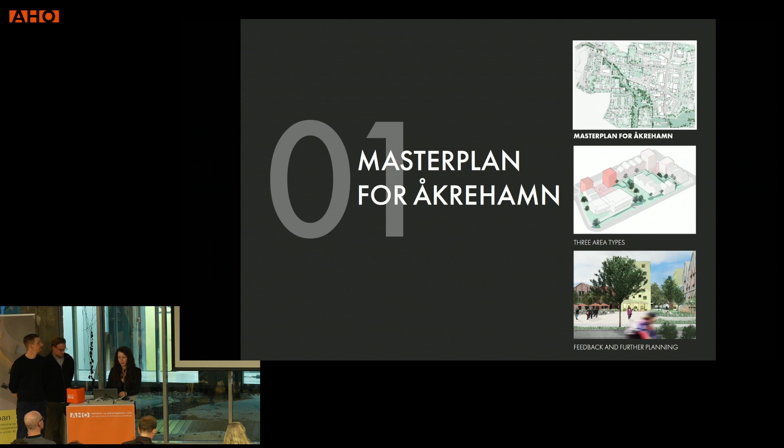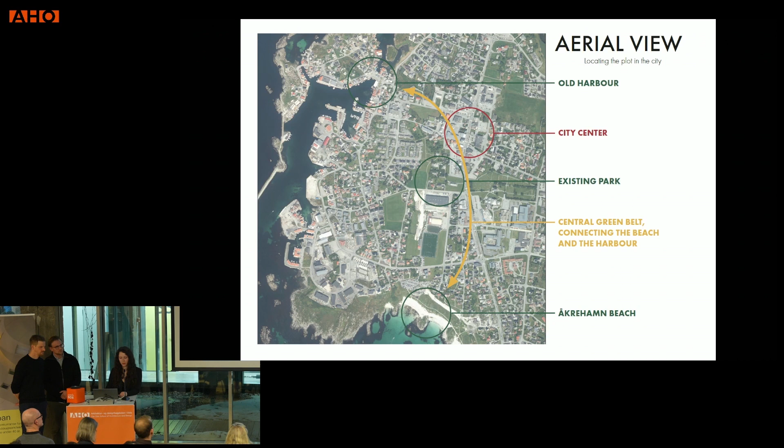But in the west part of the city, you can also see that we already have some existing nice green places, starting with the old harbor at the top of this plan. Then we have the existing park, which separates the city into two different parts. And at the bottom of this plan, you can see the Åkrehamn beach. We created a structure, the green belt, that connects all these green places into one green belt.

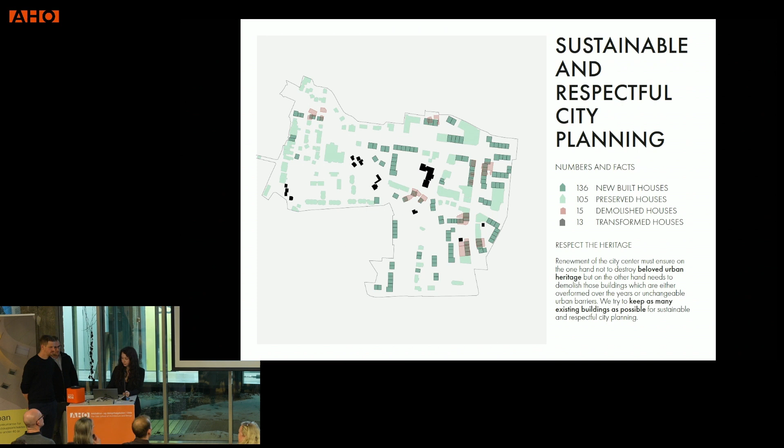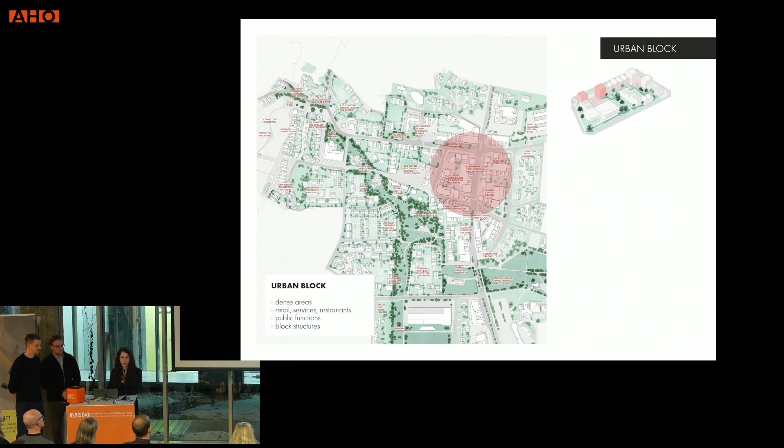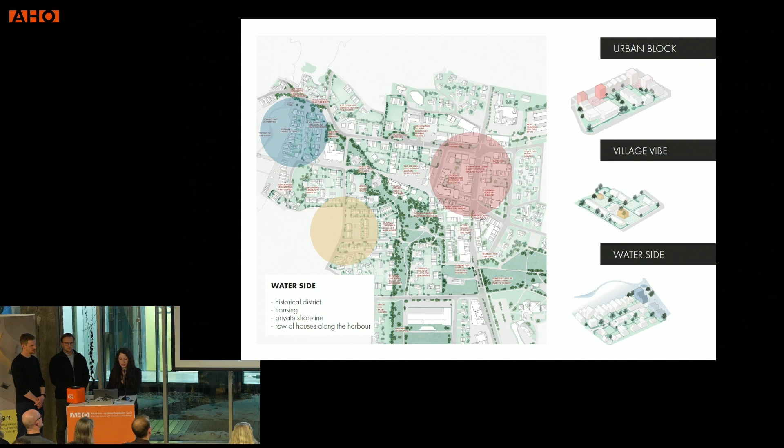For detailing, we developed three different area types, starting with the urban block, which has the density and the key scale for Åkrehamn city center. In the west part of the park, we also have less dense areas, which we called village vibe: single-story houses with a lot of green outdoor spaces, not with these typical city center functions. Last but not least, at the historic harbor, we have a historic district with a lot of nice identical buildings for Åkrehamn.

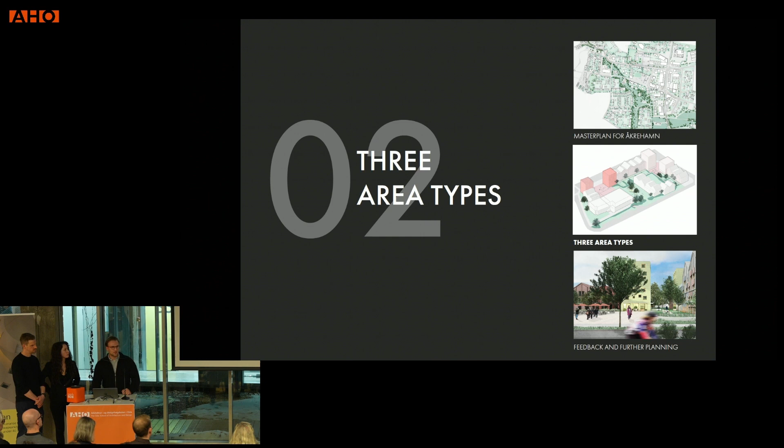As Karla introduced you to our three different area types, I'm going to go into more detail now, to explain what we mean by our types, starting with the block in the city center, which is called our urban block.

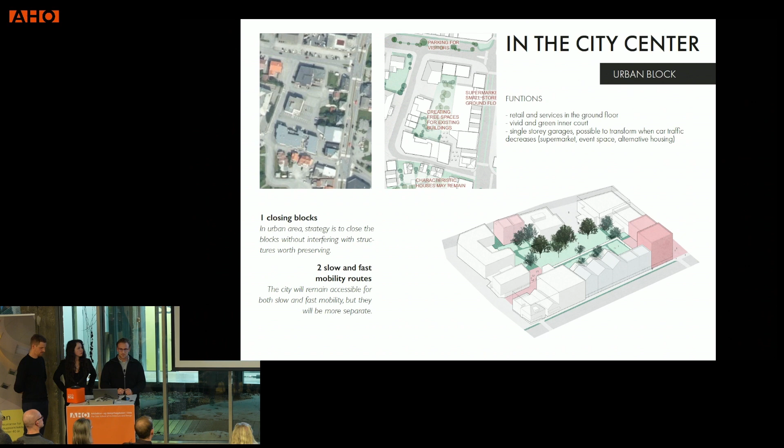As you can see, we have a street separated from the main street, which allows us to create more space for slow and even fast mobility, which is good to have both, but in a separated way.

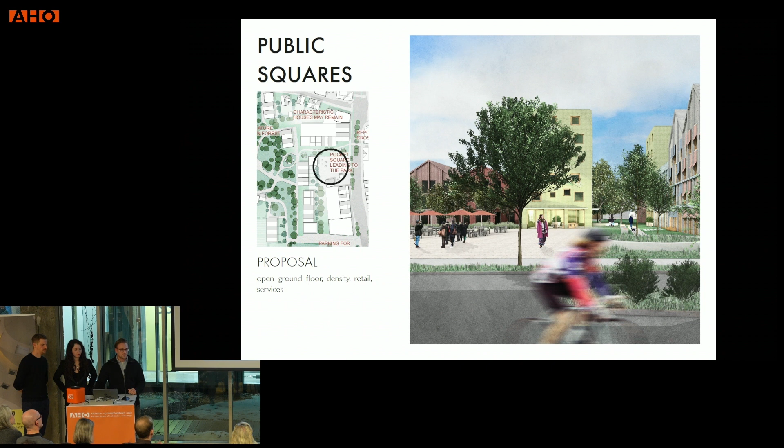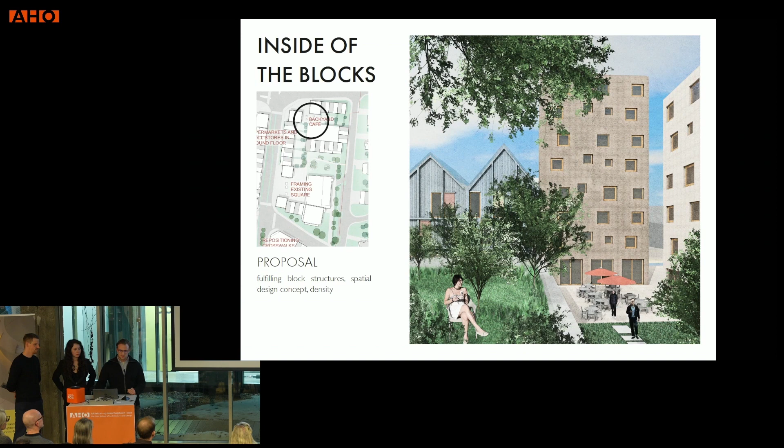Here you can see our structured urban square, which is pretty big now, but we want to have this open space for the community, for retail and services. Also inside the block, as I mentioned, we want to have it as a quiet space for the community and the density we want to create here.

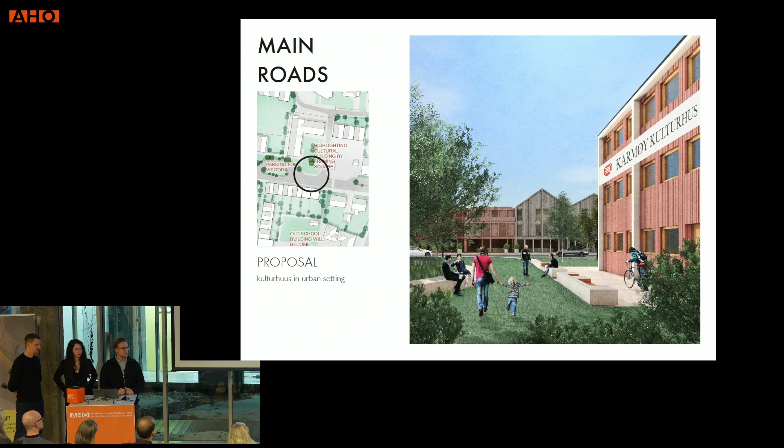On the main roads, which lead us to the Kulturhus, in the urban setting, we have this main structure in the main public area, what we call the main center of the town. This leads us to the next block.

In the western area from the park, there are the less dense areas where there is housing, like single-story housing with a lot of green area around it, and also with open green fields. So what we do there is also raise the density a little bit, but remain the village vibe, as we call it, and also bring functions into the middle of these areas.

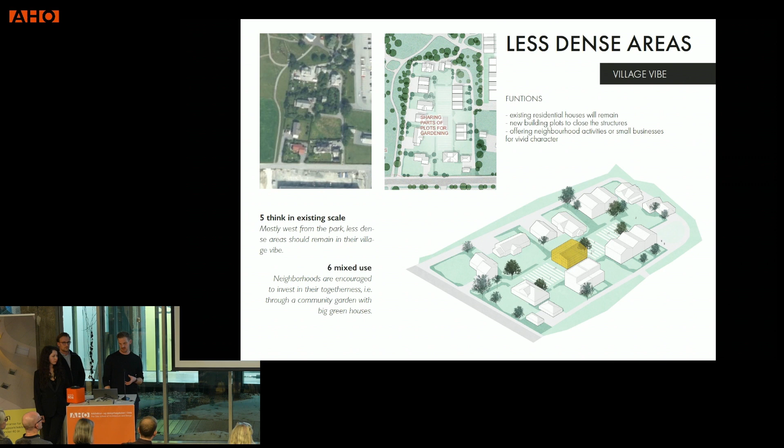These functions should be for the community, like gardens where you meet, but also commercial functions, like a brewery or some small commercial functions, to reactivate these areas a little bit more and bring them to life.

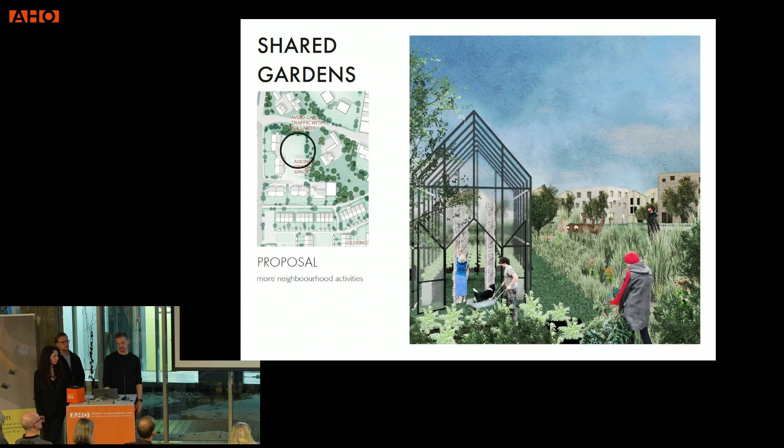In the harbor heart, it's the old heritage at the waterside. We keep almost every building, but we propose a row of housing in the north to connect the remaining square with the park, and bring new functions to the square, because at the moment it's not that public. There isn't so much going on, so the new functions will activate the square a bit.

Here in the south, there's also a lot of space where you can bring a market or activate it with small functions.

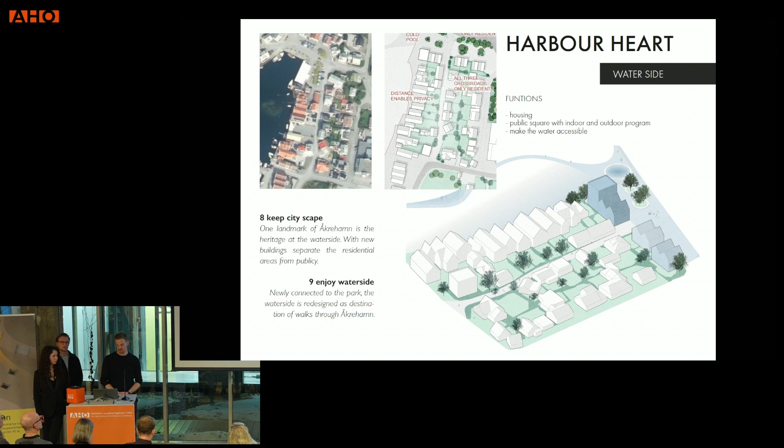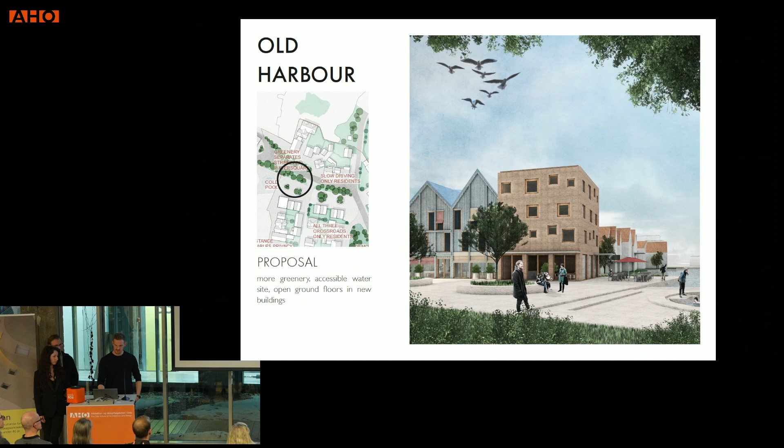Here you can see that in all the squares we propose, there are bigger buildings to provide wind protection, and also to add functions to these squares. Thank you very much.